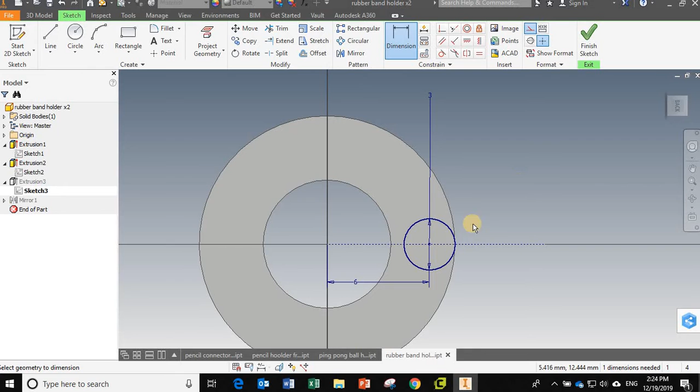I would do it by maybe putting a construction line here and then constraining that to be on the center of that construction line, but maybe I don't want to do that. Just make this on the construction line, and then I can give a dimension between there and there or something. Okay, so however you do it, you need to fully define that sketch or fully constrain that sketch. Notice all the colors are blue now. Okay, so that's one thing that you missed there.

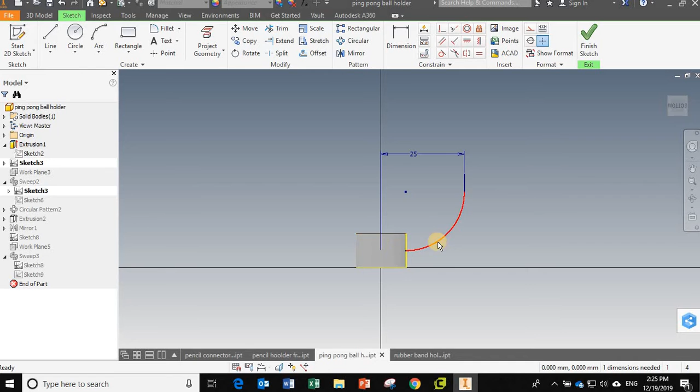Let's see here. So okay, one thing I see is you have a sketch that's useless. Sketch 3 is not being used to do anything, so I can delete it. Okay, you made that cylinder first. Okay. Yeah. Notice when I come here, yeah, okay, that's fully constrained. That's good. Very good. And I knew that because of that color, right? Okay, you patterned this. That's excellent. Okay,

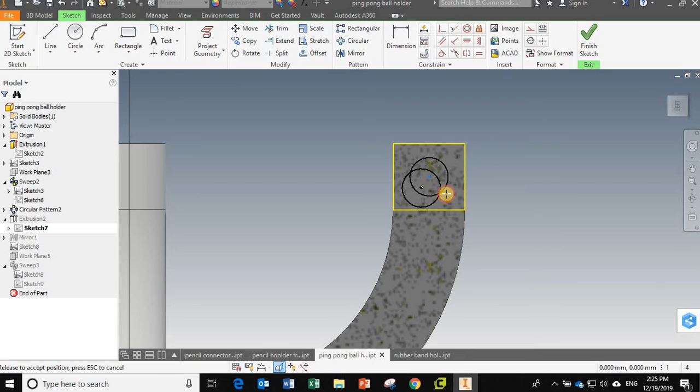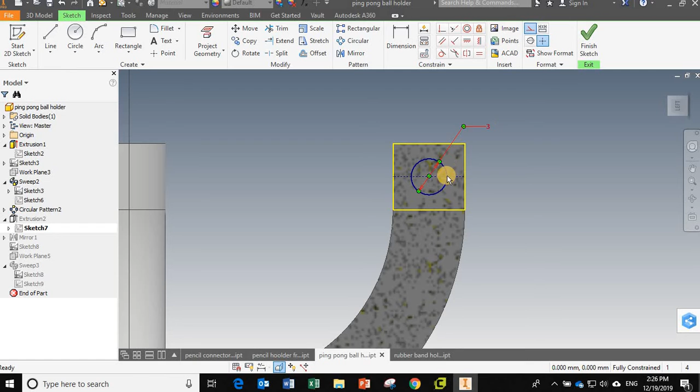one thing to note here, I think you intend for this circle to be in the center, but you haven't actually made it in the center. So you would need to do that. Okay, so again, I would do that by making a construction line like this, and then constraining this to be on the midpoint of that. Now the reason it's still not blue is because you never defined the diameter of it. Now the size and the location is defined, and notice it's fully constrained. Okay, so that's one thing you missed there.

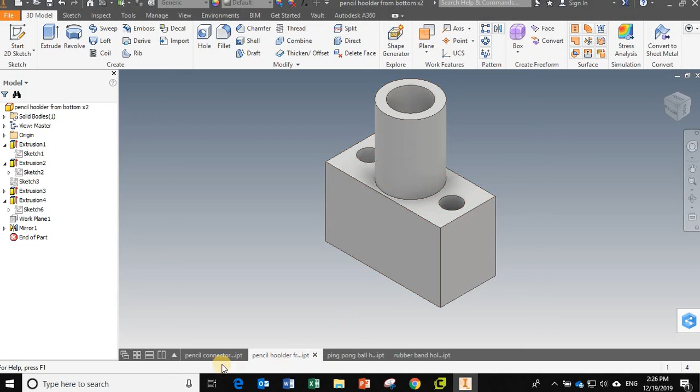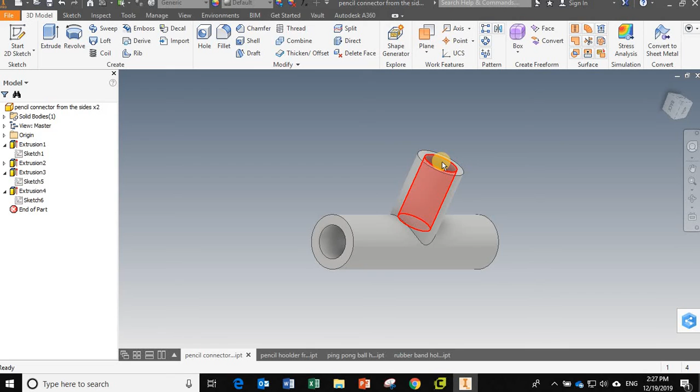Yeah, let's see, I think all these are fully constrained. Yes, that sketch is constrained, that's good. This one is very good. Excellent. Okay, yes, that's constrained. You used the construction line, that's good. And you mirrored that with that, that's very good. Over here, I think it's all good. Now, one thing I did think at first, I thought that this was the same diameter of that, but you have them as different diameters. That's okay. I first was thinking that you would need to make this linked with that diameter, but they're different, so you don't need to do that.